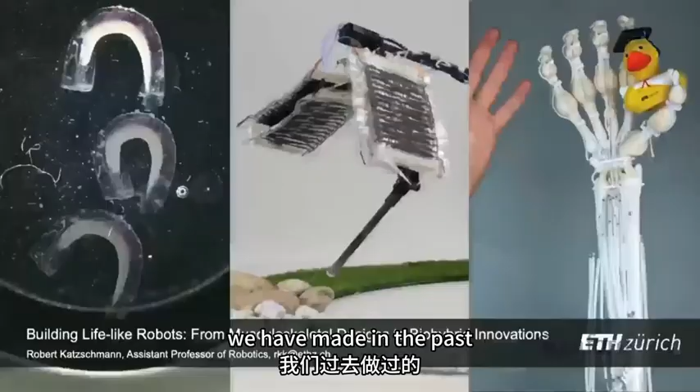I will talk a bit about how we are thinking at the moment about robot morphologies, how we want to build robots of the future, and how we could maybe rethink some of the assumptions we have made in the past about robotic designs, about robotic control.

But to start, let me take this quote from Joanna. Joanna is a novelist. She enjoys writing books. She's not an engineer. She's not a scientist. And what she said is, you know what's the biggest problem with pushing all things AI? Wrong direction. I want AI to do my laundry and dishes so that I can do the art and writing. I don't want AI to do my art and writing so that I have to do the laundry and the dishes. And I think she has something to say here, which is quite relevant.

So we can obviously use ChatGPT and other tools these days to really make our life easier when it comes to writing these manuscripts or our emails. But pushing the limit of what our robots can do, I think there's lots of open space to work in this. So what do robots already do for us today? Where do they help us in terms of home and at work? What comes to your mind?

Toasters? Oh, that's an interesting robot. This is the first, I've not heard this one before. Okay. I'm not sure how much autonomy is in the toaster. The ontology of toast. Okay. Any other robots that you can think of?

Roombas, vacuums, yeah. Obviously this is a robot. This is the robot that we know. It's going to weld your cars, and autonomous vehicles. But there's the Roomba, or these vacuum cleaners, or the robots that will wipe your floor. And then there's also these creatures. I think you call that one Clifford, I learned today, because it's red and it's like a robot dog Clifford. It's actually our home robot from Zurich, right?

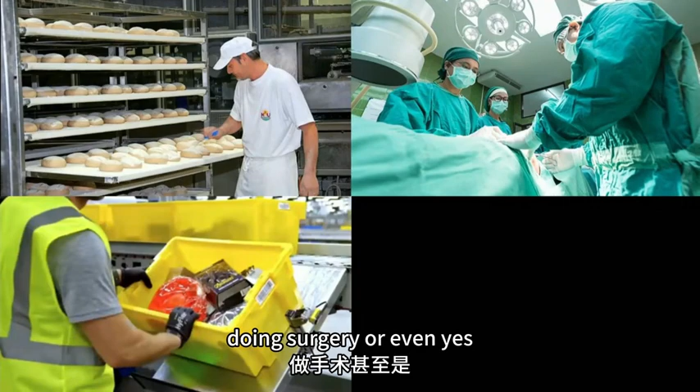It's the ANYmal. But one thing they don't do is interactions with the world. They don't really do that yet. I mean, they may be vacuuming or they touch the floor, or they maybe make a perfectly welded line. But the more messy things, like handling bakery items or doing surgery or even doing the fulfillment center duties that currently an army of labor workers are doing, all of these things require interactions, even restocking our shelves in the supermarket. So the question is, why is it so hard for this embodied AI that Joanna wants to see? Why is it so hard for them to interact with the world?

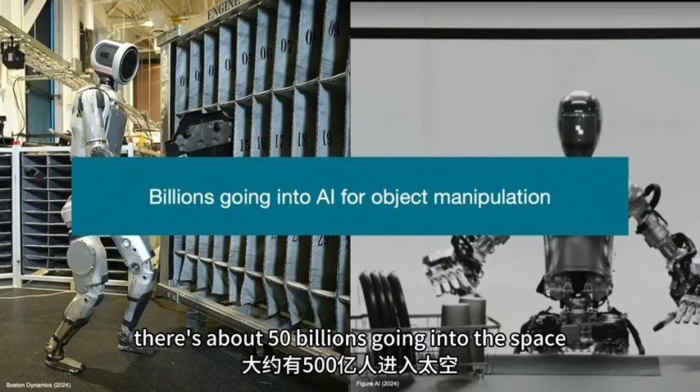Well, there's already people doing this. You might have seen Boston Dynamics picking up plates from a car, taking it from one side to another to help in the assembly line. Figure AI does something like this too. They're actually trying to do the dishes for Joanna. In this case, it's just a mock setup. And there's billions, today I learned it's about 50 billion, going into this space for AI, for object manipulation.

And I'm thinking, if the robot would do this in my kitchen, I wouldn't want to stand next to it. So it is a bit scary to think about the current technologies we use, the metal machinery, the motors and all of this coming into the design. It's going to actually be quite painful. So is this design ready to safely interact with us? Not really, right? So we need to rethink the robot's morphology.

And one way you can think about this is we could bring together the ideas from multiple worlds. So we could look at soft robots. Soft robots is something I've looked into a lot in my past, which is just to build robots to make them soft for the sake of softness. I remember many years ago sitting in a car with Oussama Khatib here from Stanford, and he was asking me, Robert, why are you building soft robots? What's the point of them? They can't really do anything.

They're so soft. And I think there is something to be said: they can maybe not handle high payloads, but they do have something to say. If they interact with you, they're not going to hurt you. Steve was also telling me today, the soft grippers that could be on the end effector of a robot can actually, at least for that part of the robot, when it touches you and hits you, not really cause as much damage as a rigid gripper.

But then they can't do the payload capacity of a rigid robot. A rigid robot can actually lift weights, it can move over rough terrain, and it can be quite sturdy. And then there is nature. Nature, that's us, that's the animals. That's what we have in nature.

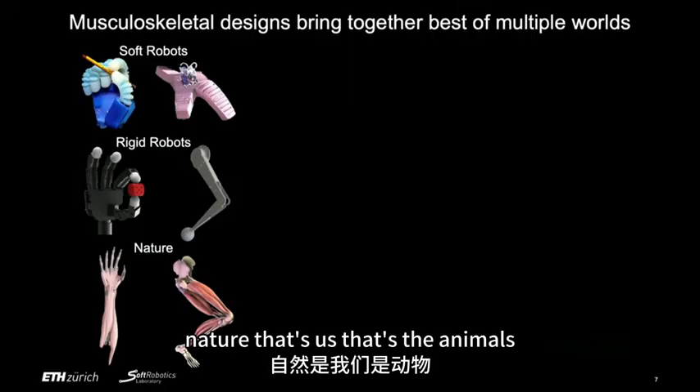It's a musculoskeletal design. So what can we do to bring together the insights from all of these worlds to build these hybrid robots, these robots that have an inspiration from the musculoskeletal design idea, but also from taking the softness of the soft robotic world to build these muscles and other soft tissues. And in the end, have a robot that can both carry payloads, but also can be gentle and can be adapted to the environment. So its mechanical impedance can be better matched with the actual world.

Like yesterday, for example, I saw a Booster Robotics robot. I think you also have one here. I saw it earlier in the center. When you turn it on and have it walk around, it's really loud. It's hitting the floor and stomping around. And it's just because there's many, many things you can do with a musculoskeletal design that rigid robots with its motors can't do. So today I will be talking about a couple of ideas in this space.

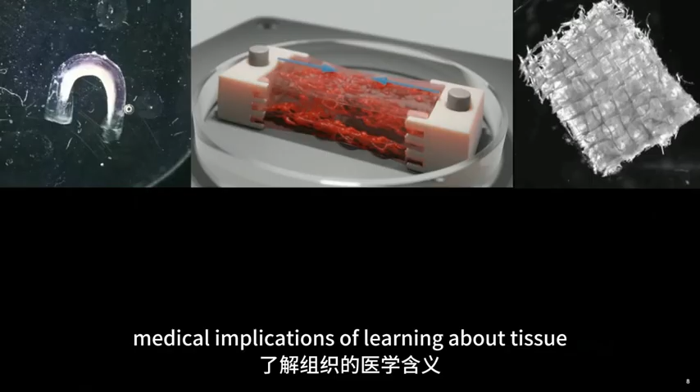So first, I want to talk about the most extreme ends of what we're looking into, which is to actually build muscles from cells. And then I will talk about what are challenges that we face there, and even quickly mention what could be even medical implications of learning about tissue engineering with biological cells that help for robotics, but maybe also beyond this. And then I will talk about musculoskeletal designs.

So taking not just from one muscle, but thinking about many muscles and what are the challenges there, towards making them actually more feasible and untethered, towards the question of how can we produce all of it, not just the muscles, but also the whole structure. And then what are the autonomy challenges there? Like how can I actually showcase these designs that I can do something autonomously? Because if I just build something, show it a great design, but it doesn't do anything, you won't necessarily give up that Unitree robots that you are already having in your lab.

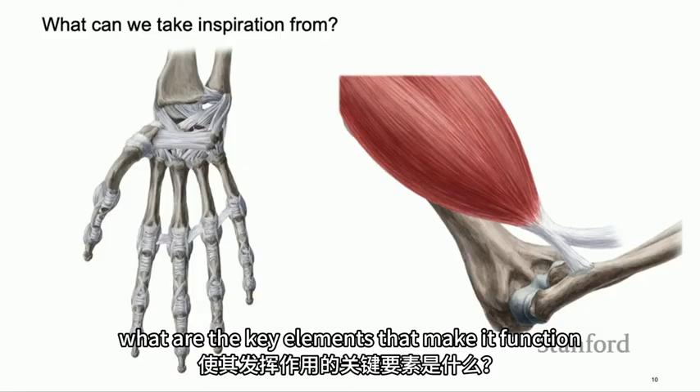So what can we take inspiration from? Obviously, I can take my hands, I can take an arm, I can take a leg, I can look at the human anatomy, and I can ask myself, what are the key elements that make it function and work? It's the muscle. The muscle moves it all. The muscle makes the key ingredient, in my opinion, of a robot. If I don't have an actuator, in this case a muscle, it's not really a robot.

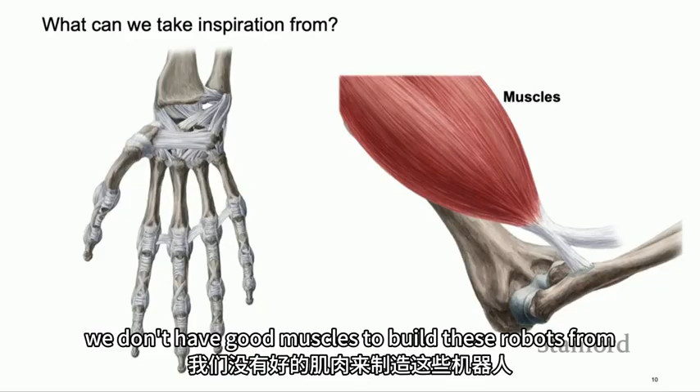But then I also need other parts. I need the bones, I need the tendons, and I need the joints, and I need the ligaments. So we need to come up with solutions for all of this and the interplay of all of this to build our future robots. We have started to look a lot into muscles because we see the biggest lack in the musculoskeletal area is we don't have good muscles to build these robots from. So let me spend a lot of time on this today.

So the first thing, as I mentioned already, is we have a part of our group that just asked the question, can we build robots that are made of cells? So can we build muscles that actually use cells? And this is not your hypothetical cell on the computer that you simulate. No, I'm talking here about using the cell from animals. And now the question is why? Why would I want to go this route?

Mark, why would I want to use cells? Isn't it crazy that we can speak, walk, run, bicycle by eating two hamburgers of food a day? The way we process energy and move is really efficient. Yes. So the way that we take in energy is drastically different to the humanoids that we see right now. They have to have a battery, but the cells, we take our hamburgers. Or maybe other healthier foods, but like, yes, definitely.

So, if I were to look at a few points that people would say, these are the features that we want to really make use of when we work with cells, then it is the self-repair, the ability for many cells to come together and eventually in a swarm arrangement to assemble, to self-repair, to be self-sensing. So cells have multiple capabilities. They're not just, for example, a muscle, but they can also have proprioception.

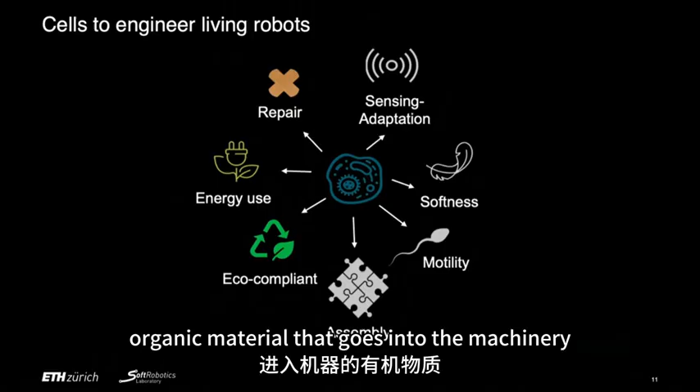And they're also inherently soft. So it meets the requirement that, as a soft roboticist, I like to see: cells can be soft if they are not becoming a bone. And they can also be sustainable and eco-compliant. So I'm using organic material that goes into the machinery and it produces the structure. If I find fully sustainable ways, I don't necessarily need to produce a lot of waste with these robots.

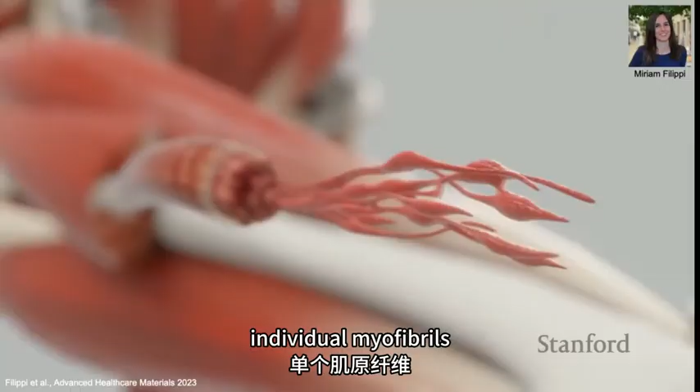So when we look at this, how should we go about this? Basically, we look at a muscle, and a muscle consists of all of these individual myofibrils that you start off with, and you could culture them in a petri dish. And well, this doesn't really give you a muscle yet if I just throw them randomly in there. So you have to come up with ways of bringing them into a structure that can be a muscle.

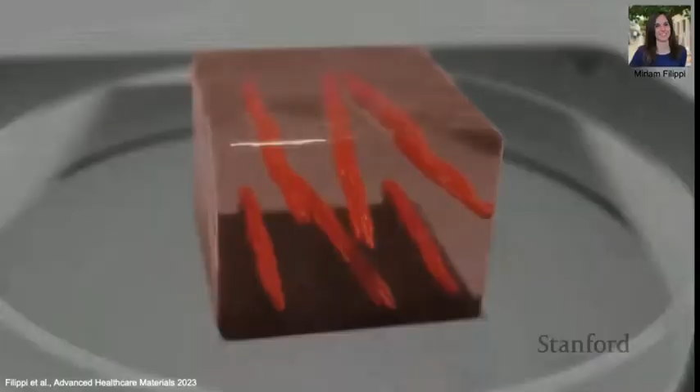So one way of doing it is you take a hydrogel and you throw so-called stem or progenitor cells into the hydrogel, and with the right differentiation protocols and maturation protocols applied to it, you can actually build up muscle fibers. So in the interest of time, let me dive directly into my favorite project that we're doing right now.

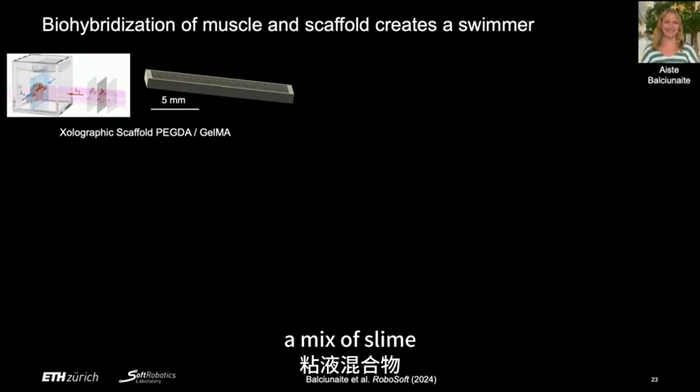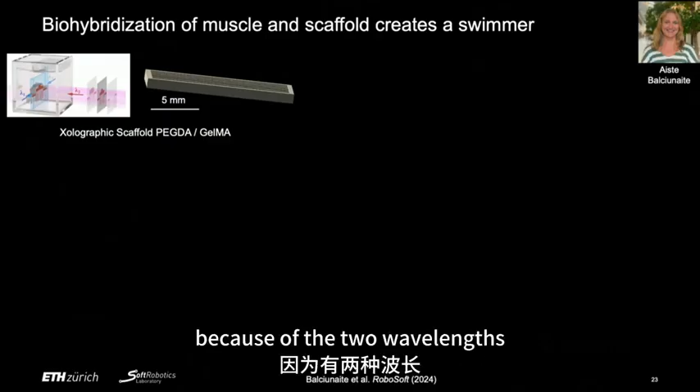And this structure allows, when we place the cells on top of it, a mix of slime, I will get to it in a moment, to align along those grooves and also to restructure this whole scaffold and eventually makes a swimmer out of this. So we have this construct and we have a printer that uses two wavelengths. These two wavelengths go into a bath, and wherever two wavelengths hit, it takes a photoinitiator. That photoinitiator becomes active because of the two wavelengths. And at that point, it causes a polymerization of the hydrogel.

So we use this to build these scaffolds, and then we put the cells on top. And I can tell you right now, we're also working on projects where we don't put them on top, but we directly put them in there. But this will be for the future. For now, let me talk about this. So we have basically the scaffold, we have the cells, and then in the end, we get the scaffold with the cells seeded on top.

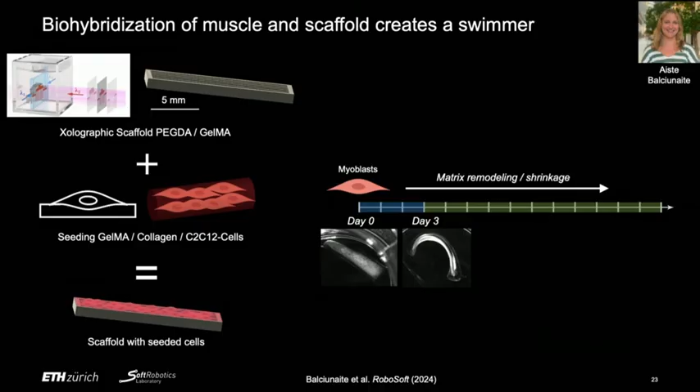And we start at day 0. Down there, you see the construct. It has the scaffold underneath. It has the cells on top. And then as the procedure in the differentiation goes along and the matrix gets remodeled, the matrix starts to shrink. And so the whole thing starts to bend into this U-shaped form. That's because these muscles start to fuse, they start coming together. And as the days pass by, we eventually end up with this construct that is really bent into shape. And the muscle has matured, and now we can start playing around with it. So we're going from myoblasts towards these myofibers.

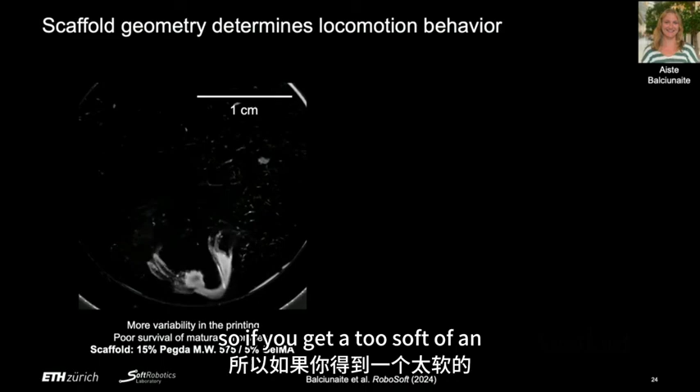When you get it wrong, that's what you get. So if you get too soft of an underlying scaffold that is not surviving, we would say it has a poor survival of the maturation process, you end up with these slightly dysfunctional swimmers. If you get the mix right for the scaffold, you can actually get a pretty good proper swimming behavior from it. And it swims, I will get to this in a moment, because we give it a stimulus that causes the muscle to contract, and we can pace that stimulus, we can control it.

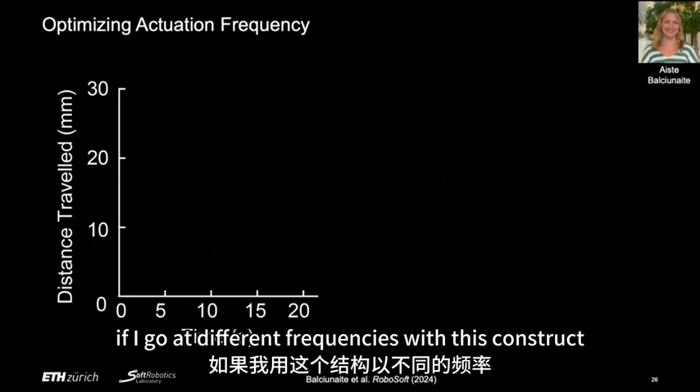So Aiste went ahead and she tried different frequencies. She wanted to see what happens if I go at different frequencies with this construct. So if I go at 1 hertz, what ends up happening is we have these slow swimmers that can travel a short distance in a longer time. As I go up in frequency, you get faster swimming behavior in the Petri dish. And here, this is going up to 3 hertz and then 4 hertz.

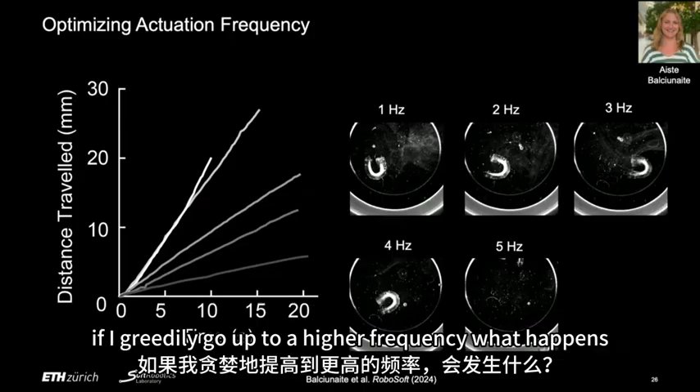And then eventually I greedily go up to 5 hertz and it gets faster. It's still a bit faster than 4 hertz. It swims out of the frame faster, so that's why the line is shorter. And now the question to you: if I greedily go up to a higher frequency, what happens? Slower. Why?

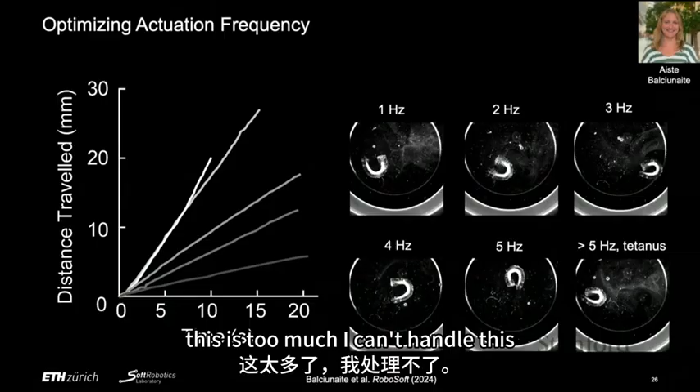Viscosity, friction, okay. Any other guesses? I think it might paralyze because the stimulation is too high. Yes, it cramps, it kind of goes into tetanus. So that's what we get here - this little one that's just sort of like, sorry, I can't do this anymore. You're overstimulating me, this is too much, I can't handle this. So yes, it does not swim anymore.

And it's interesting - you can start learning about these muscle constructs and how they behave without actually having to harm an animal. I want to mention, we never killed an animal for this experiment. We just got a cell line from a supplier that has immortalized the cell line, and we can passage it and multiply more and more of these for the experiment.

So this is a close-up from the 5 hertz swimmer. Over there you see the electrode that gives an electrostatic field at 5 hertz. Every 1/5 seconds we give a 1% stimulus, meaning it gets a short stimulus, a 1% duty cycle, then it starts its contraction, eventually relaxes again, and then the next one comes. This is what happens here with the swimming.

What happens when you increase the amplitude? Well, at some point you start electrocuting the cells in some way, but we haven't gone too high with this. It's just a trigger - the energy comes from the nutrients, it doesn't come from the electrical field.

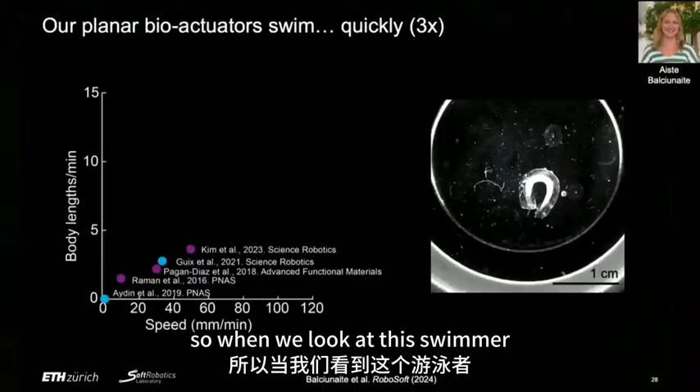So when we look at this swimmer, we compared it to other biohybrid ideas and directions, and we found we got a much higher body length per minute swimming speed with this design. Now we're investigating this area even further, trying to understand, for example, can we model the behavior here? Can we understand why it swims this way, the interactions of the surrounding fluid with the construct? Can we also optimize these structures by changing the length of the muscle relative to the length of the scaffold, and study if this model is actually accurate compared to an experiment we built? This is all work in progress, and it becomes a nice playground for us to learn about these biohybrid systems.

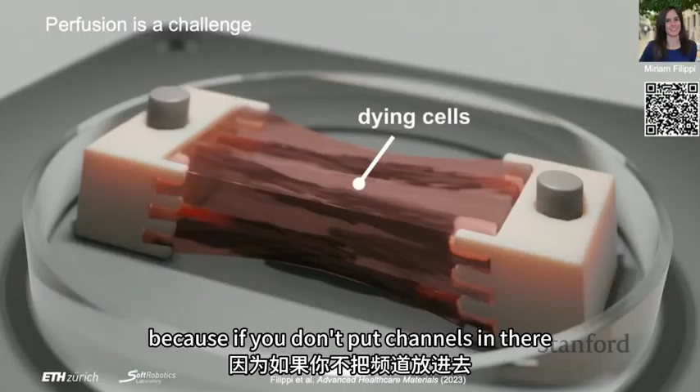Another problem is perfusion. Perfusion means how can we actually make this muscle thicker and bigger? Because in the end, we don't want to just have a couple hundred micrometers of muscle, but centimeter thick muscle or more. So what we're doing here is trying to understand what happens when we put channels into a structure, because without channels you'll have dying cells in the core of your muscle construct. All of our muscles have a perfusion system, which allows them to take away waste products and carry oxygen and nutrients to the muscle.

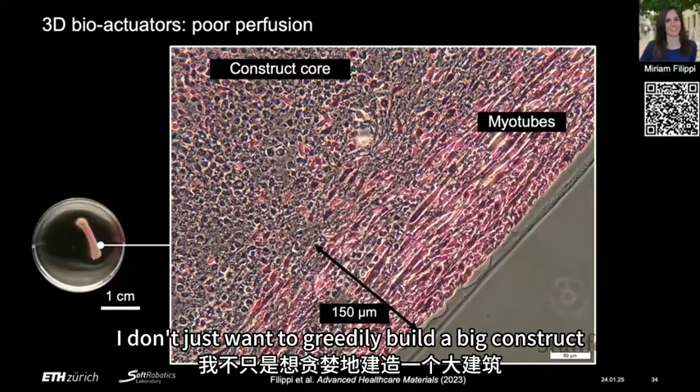So if I look into a muscle construct that has no perfusion channels, what we'll see is maybe 150 micrometers of somewhat built up myotubes, which gives you contractions. The deeper I go into the construct, these are all dead cells. And this is bad, right? I don't just want to greedily build a big construct - if it doesn't get nutrients, it won't survive, and it won't give me muscle power.

So Miriam started looking into this, and she said, let's actually make a construct that we extrude both the myoblast, but also an anchor structure on each side. And then we also interlace perfusion channels that can afterwards be removed. With this experiment, we basically take a muscle, run a dye through it, and want to see how quickly this muscle becomes pinkish, becomes this color.

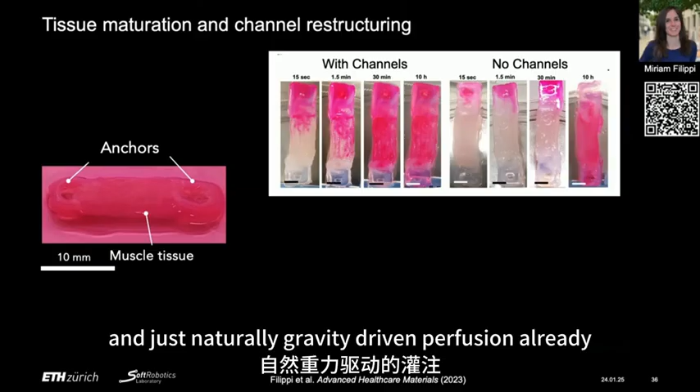So we take constructs with channels and without channels, with just naturally gravity-driven perfusion already. We lay the construct at an angle, place our nutrient solution with a dye on top, and within a minute or so we get perfusion through the construct, which we wouldn't get without the channels. Another thing we see in this study is, 6 days into the maturation process, we still don't have fully built up muscle fibers, and we still have these white channels that we produced initially.

But as it further matures, these channels get thinner and thinner. That's because of the shrinking and remodeling that the cells are doing to the hydrogel matrix. So that's not even accounted for in the models I just showed you. We haven't really accounted for the maturation process that goes from an initial design to a matured muscle that has completely reshaped itself.

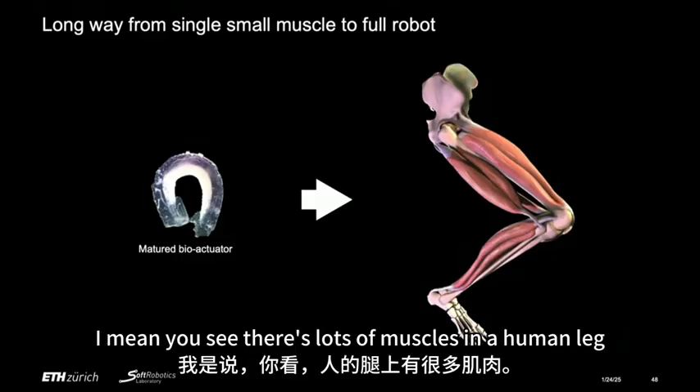So we're still a long way away from using these actuators to build this. You see there's lots of muscles in a human leg, and they're really big. The thing I just showed you here is on the order of 1 to 2 centimeters in size, and we want to build muscles that are much larger than this.

So one thing we have been looking into is using hydraulically amplified self-healing electrostatic actuators, which is a mouthful, also simply called HASELs. This is something that Christoph Keplinger's group at CU Boulder developed. We've been using this as a starting point for musculoskeletal designs that take electrical energy from a battery and directly place it into contraction.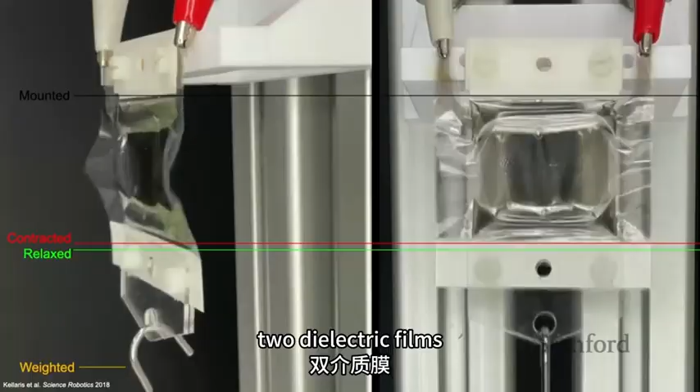So this is how it looks like in real life. This is using two dielectric films, and then we place on it a carbon electrode material on the outside, and we put opposite charges on each side, and as I apply voltage, it lifts up a weight over there.

The first thing we tried with this is we made a fish, which is a nice thing to start off with because we don't have to worry about gravity. We can just throw it into the liquid and try it out. But we had a few problems with this. One thing you can't quite see is we are not swimming in water.

Let me ask you why. It's conductive. And why is this a problem?

The electrodes in the original HASEL design are just exposed, and you don't really want them to be in a conductive liquid, so we started swimming in oil. But swimming in oil is actually quite bad — it's not so easy to swim in oil compared to water. Have you ever tried to swim in oil? Probably better this way, not to swim in oil. But this fish had to swim in oil, and it also had multiple electrodes coming in.

And so that lets me point to the elephant in the room. The elephant in the room is there's these humongous power supplies that sit on the outside. People usually don't like to show them because they're not very attractive to talk about when discussing robots that will discover the world, but there's this huge power supply.

So we then started, first we tried things outside of water to see if we can use the HASEL design to build legs towards the idea of a musculoskeletal design. So here, this is sort of our baseline system. We call it a joint-centered system, or joint-centered design, where we take an electromagnetic motor and place it into each joint, and then we basically run current through these electromagnetic motor units. It's a brushless motor, and then it moves around. This is what you know from current humanoids.

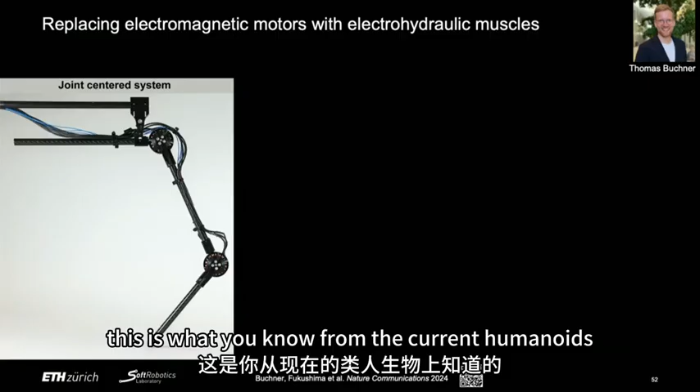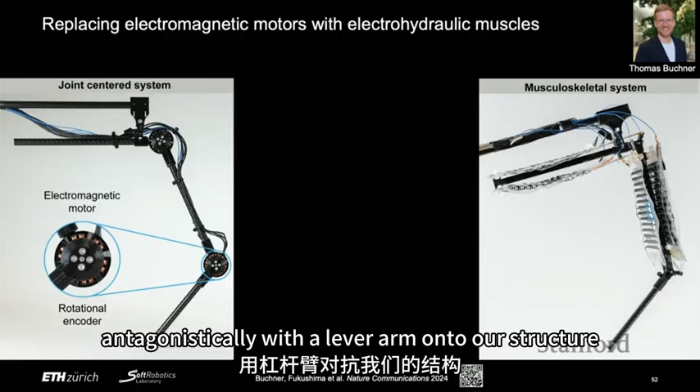We built everything the same way as we built our second HASEL system. So here we have the motor, we have an encoder in there so we can know where we are in terms of positioning — we need this, otherwise it doesn't work. Then we build a musculoskeletal system: here we ditch the motor. The rest of the carbon fiber structure remains the same, and then we place a ton of HASEL muscles in there that basically become our antagonist muscle units, allowing our leg to pull antagonistically with a lever arm onto our structure. This is the HASEL on the right side. We call it self-sensing because essentially it allows us to sense the contraction and also the change of capacitance under loading.

So basically, on the left side we have the electromagnetic motors, and on the right side we have the HASEL muscles. These are our actuators. On the left side we would use joint angle encoders, while on the right side we can make do with just the self-sensing capability of the capacitors. On the left side you usually have a linear transmission, like a planetary gearbox, or some other way of taking high rotations per minute and low torque and translating it to higher torque and lower rotations per minute, which you often need for robotic applications.

And we don't need this. We just use different nonlinear moment arms for our tendons to attach to, the same way that we do it in our human body. Or maybe Mother Nature does it that way in our human body.

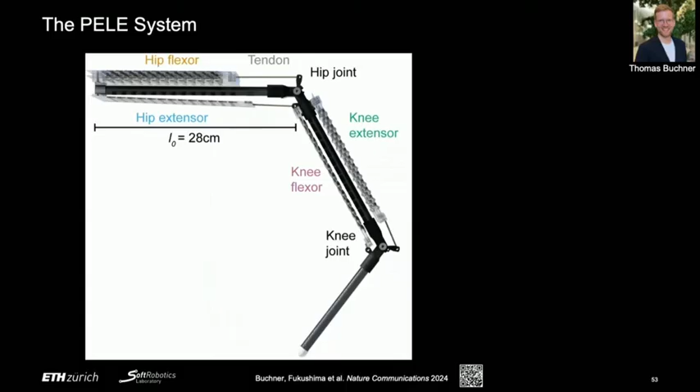So this is the PELE system, and it has the hip flexor, the hip extensor, the knee extensor, and the knee flexor. So we have these 2 degrees of freedom in the system. Then we have 4 high voltage amplifier units.

We also do packaging of these muscles. The design rule for this: if you stack the pouches in series, you get more strain, more delta X. If you put more on top of each other, you get more force. This is how you can basically design your muscle unit in this case.

And now let's get to some experiments. So Thomas then started looking, together with Toshi, at how agile the system is, how adaptive, how efficient, and how self-sensing works for the system.

When we look at agility, we try to do, for example, high jump experiments. Just to see, can this thing actually hop off the ground? And how does it hop off the ground, and what are the impact forces once I lift off and land again? This let us study the system from that perspective.

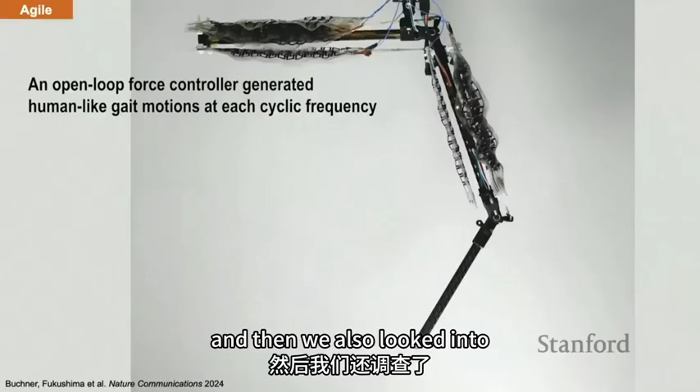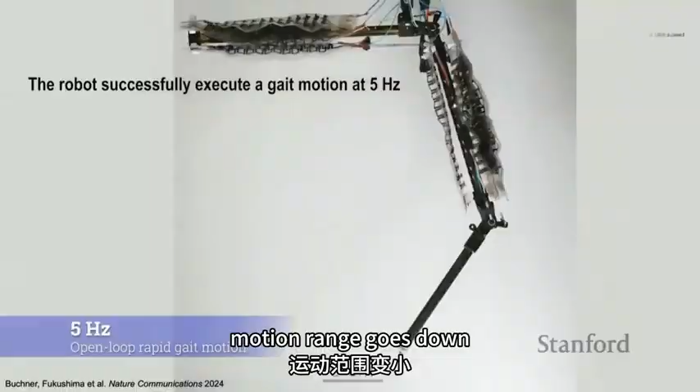We also looked into how fast we can run this. I can actuate this at 0.5 hertz and get a certain motion cycle, and I can go faster. For example, at 3 hertz, which is still a slow speed, I get a fairly large motion cycle. But as I go up in speed from 3 hertz, I can go even faster and we get a smaller motion cycle. At 5 hertz already, you see the motion range goes down.

And we can run this all the way up to 10 hertz. So this is actually quite agile. Let me run this again - this is 10 hertz. So the thing can be run quite fast just by charging and discharging the muscle, but we get a fairly small motion range. I'll get to what causes the limitation to the motion range when you have 2 muscles pulling on the structure.

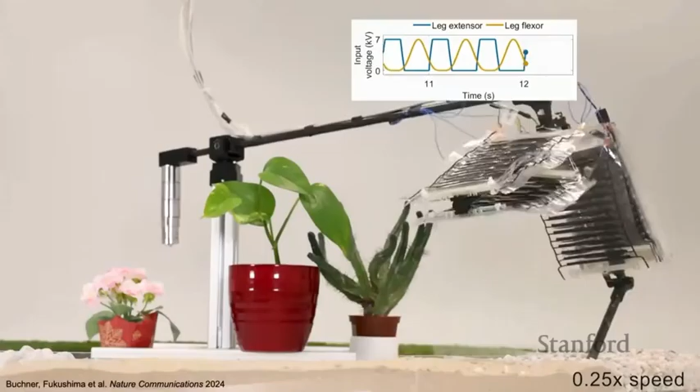So now we tried an open loop experiment where we put it onto a boom, and now the leg is hopping through our little garden - this is like the lab garden environment, with a cactus and a proper plant, probably the only plants you can easily maintain in the lab. You see the leg is capable of going over different types of terrain without using any closed loop control. All we're doing is changing the signal you see on top, between the actuation of the leg extensor and leg flexor, and that allows it to hop over the terrain with a hopping gait.

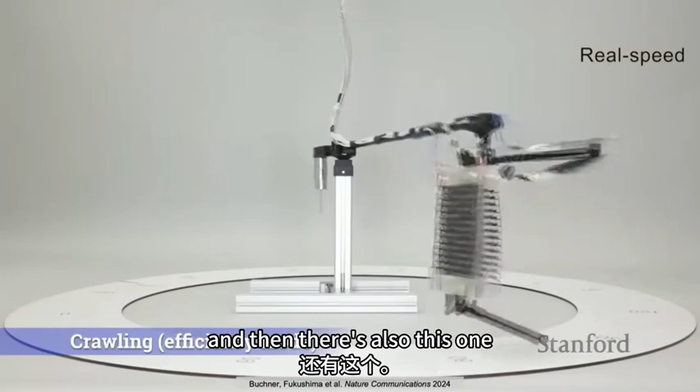We can also try this for other surfaces and see how well it hops on them, and we can try different hopping modes. Here is the speed mode, where we can do a very long stride. But we can also do the efficiency mode, where we use less energy - overall, from a cost of transport perspective, the more efficient mode. And then there's also this one, like the crawler, which is actually the most efficient mode because I don't have to take off - I just crawl forward.

But it only works because I take the rubber tip off the foot, so I have a little bit of better grip going down on the surface, and I don't have a rough terrain.

So then we looked at the cost of transport, and we found we were quite good, at least for the system we looked at, in terms of a single foot compared to land animals.

And then there's another thing where we looked into the self-sensing muscle. So we want to understand, can we actually use the capacitive change of the muscle to detect an obstacle?

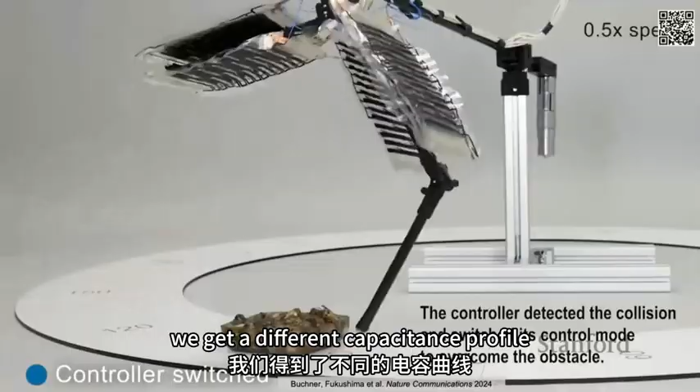So here's the obstacle on the left side, that's just a stone. Now the robot is just hopping in a normal gait, and then it hits against the stone. It senses a change in its capacitance, and it changes its gait cycle. This allowed us to see the capacitance change. The moment it makes contact, we get a different capacitance profile for hitting against the stone. Then we just change to a different controller that lets this leg hop over the stone.

Then we also looked into what if we not only use the muscle by itself with its capacitor, but we can actually, nothing speaks against still using an encoder. Like, why not have an encoder in the joints as well?

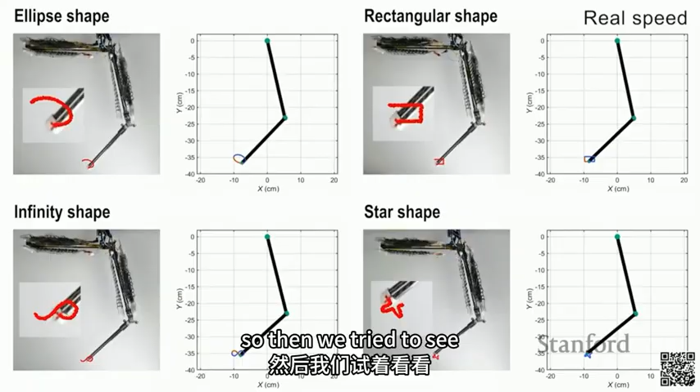So then we tried to see, can we track different motion cycles? Can we do a circle? Could we do a figure 8 and different sorts of motions? And how accurately could we track a reference trajectory with the tip? One thing we found in this experiment is that we were able to track it, but we had a fairly limited motion range. Now the question to you is, why?

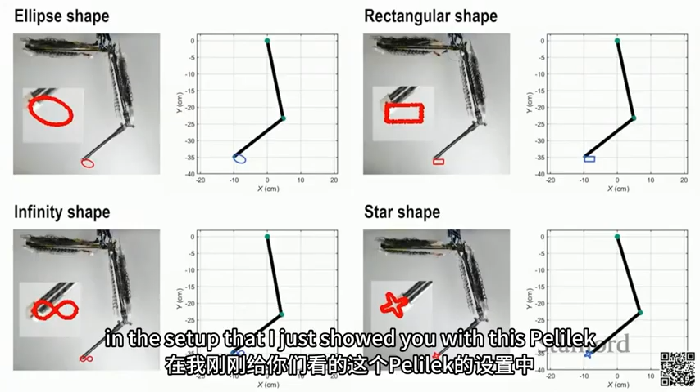Why, in the setup that I just showed you with this Pelé leg, is the motion range sort of limited to a small motion range in the tip of the leg? It's not able to do these large motions. I can do this with my arm, right? I can do quite large motions with the tip of my finger. So what is mechanically the challenge here?

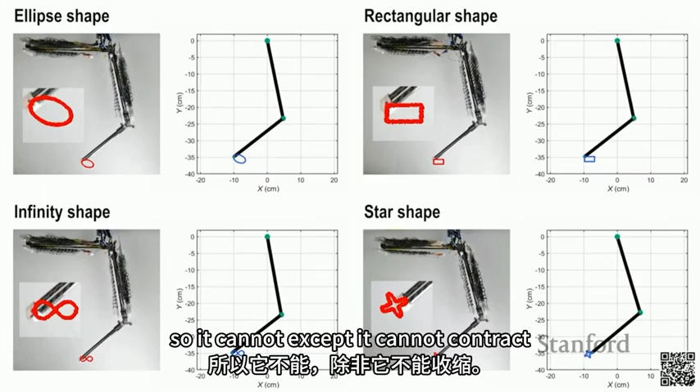The muscle. And what's the problem with the muscle? Why can I not do this? It's a single isotropic material, so it can contract or extend only as much as the muscle allows. It can contract, and technically you can collapse this muscle passively because it will just fold up or buckle up. But the problem comes, and you see this now here, if I take the muscle and I pull on it, it doesn't extend. It's a film, a flexible film, but it's not really an extensible film. If I pull really hard on it, I just rip it apart. It doesn't really, it's not elastic, right?

So if I look at this from the motion range you see here with the actual natural muscle, the challenge is that if I want to match the range where animals would have their muscle also be at, I would have to actually be extensible. Down there is the length over the resting length, L0. Natural muscle can be both contracted actively, while you see my triceps right now was extended to allow this to happen. And that's not possible with this design.

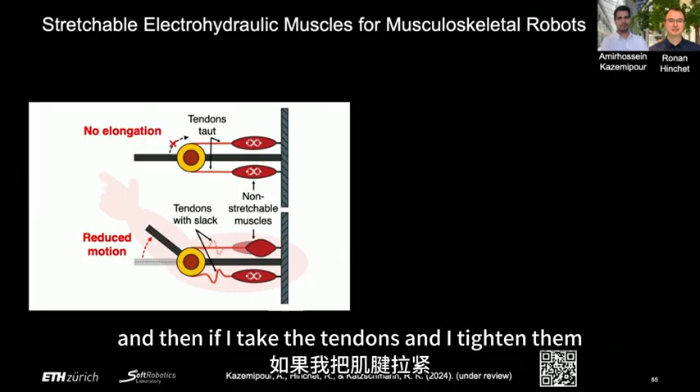So then Amir and Ronan thought about what's the problem here. We have on the top the two muscles. This little cross in there just says the muscle is not really extensible. If I take the tendons and tighten them, ideally for a good system they are tightened properly. If I do this, then I get no motion range, because I'm trying to contract one muscle and the other one will not give in and won't allow me to do this. But if I now put a little bit of slack onto the tendon, I get some motion. And that's exactly what we did for the Pelé system.

We put a little bit of slack in there, so we get that motion. But you can imagine that's not very good from a controls perspective, and it's also not a very efficient way of doing it. So what we started doing is to say, why don't we take the muscle and couple it with a clutch? The clutch itself is basically something that can selectively engage and let go, the same way in your car that would be the case. But also it has an elastic fabric around it that takes the clutch back once there's no loading on it.

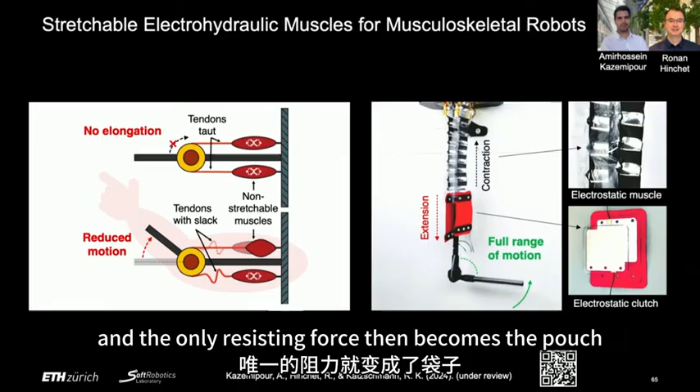So the way this looks, we have the HASEL on top, we call it the electrostatic muscle. And on the bottom, in this pinkish red color, that's the fabric. Inside of the fabric sit two PVDF clutch units, which are basically two dielectric materials with electrodes. You apply a voltage and they stick together and become a closed unit. If I take the voltage away, they can freely slide, and the only resisting force then becomes the pouch, this pinkish unit around it, which extends.

So what happens here is, on the left side, I do muscles without clutches, and you get a limited motion range — you have just some slack in there. On the right side, if I actually use the clutch, I can get a much larger motion range. So you can imagine me now using this to build the follow-up generations of the Pelé system. We get larger motion ranges and can actually start building humanoids or even just bipedal or quadrupedal systems from this.

So let's get back to the elephant in the room. What was the elephant in the room again?

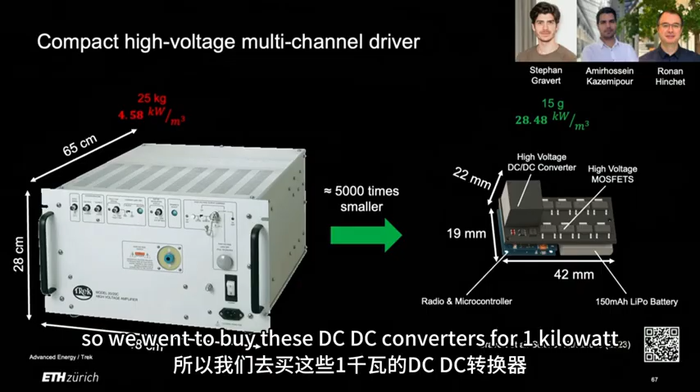Why is that? Because at those high voltages, they use other means — for example optocouplers, as they're called. They use an optical signal to couple, and that is actually very energy hungry, it's bulky, it's big. So we went and bought these DC-DC converters for 1 kilovolt, and we bought MOSFETs which were really compact, but we had to go back and redesign the HASELs.

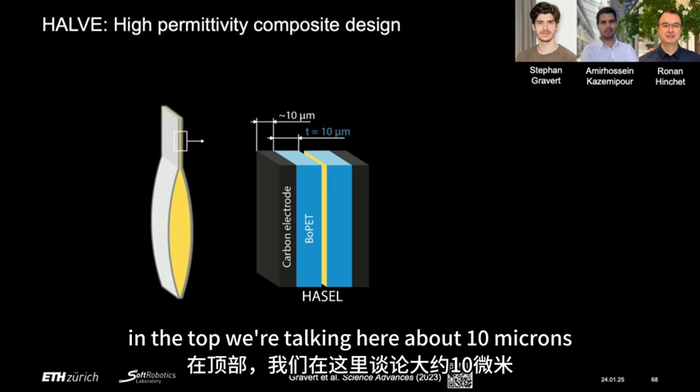So HASELs are designed like this — the traditional HASEL design. We have an electrode, then a dielectric, in this case a BoPET in the middle, and then we have some oil in between. When the thing is stacked, it looks like this — I'm just showing you the little excerpt up top. We're talking here about 10 micrometers for the electrode and about 10 micrometers for the functional layer that isolates the charges and acts as a dielectric.

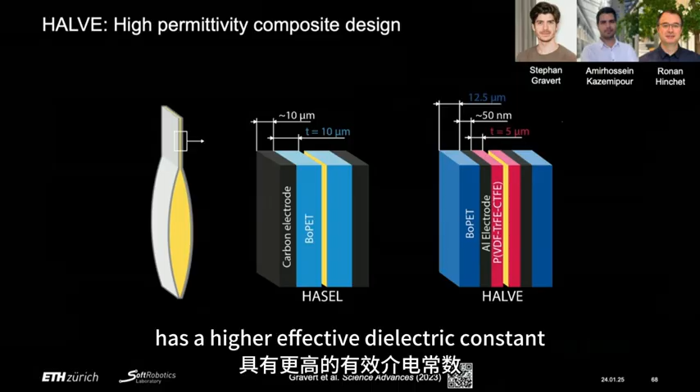Now, I can replace this and move the BoPET to the outside, have an electrode, and then use a different material shown here in red, called PVDF terpolymer. That PVDF terpolymer has a higher effective dielectric constant, which allows us to go down in the operating voltage while we remain at a high force. So with this, we made a muscle called HALVE, which stands for hydraulically amplified low voltage electrostatic actuators.

And with this composite design where we have these multiple layers, we could build a muscle that now gives us a couple of advantages. First of all, the electrodes are actually now insulated, so I could put this also underwater. And I also have the low operating voltage. How does this look like?

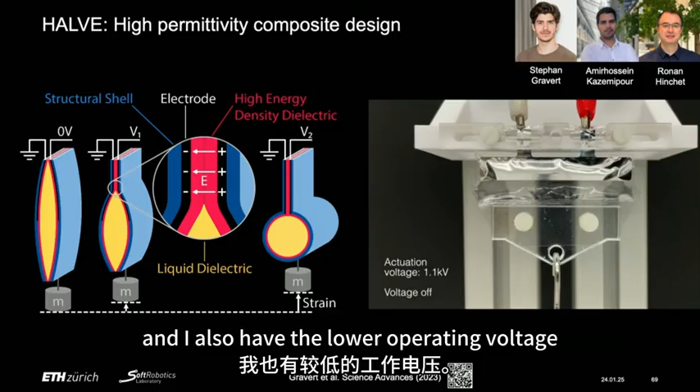So from an actuation voltage perspective, if I operate at, let's say, 1 kilovolt up to 1.5 kilovolts, I very conveniently am in the regime of low voltage components. So from power electronics industry norms, anything below 1.5 kilovolts is considered to be low voltage. So this has a certain advantage to operate at this regime.

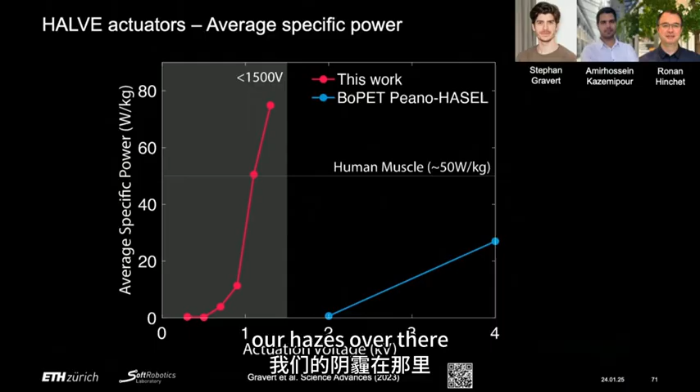And the other thing is, with these muscles, we were able to go to powers of like 80 watts per kg, which is very comparable to a human muscle in terms of average specific power. Our HASELs over there, they run all the way to like 8 kilovolts to do the same thing. So now we made a muscle that you can touch.

We also have a swimmer that would use 2 of these muscles in there. And then we have this little gripper that holds onto an object. Those were our first test cases to see how well we can use these muscles. And we are now building the follow-up systems to use these muscles in the designs that we're interested in, so that we can build robotic systems that operate at like 1 or 1.5 kilovolts with compact electronics and reap the benefits from this design.

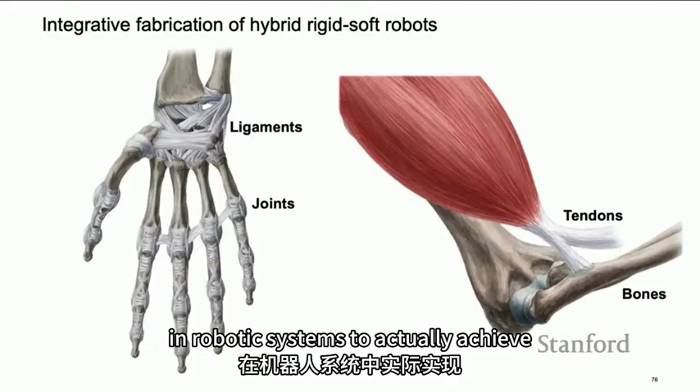Okay, so I talked a lot about muscle, but there's other things in robotic systems to actually achieve musculoskeletal designs. And as I said before, these are ligaments, joints, tendons, and bones. So one of the systems in nature is our hand that has a lot of that in a very compact space. And if I want to build them, it's quite tedious, and it takes a lot of time to actually assemble it.

So if we manually assemble robotic hands in our lab, it takes us multiple days to do a good job at that. So we wanted to figure out what we can do to speed up this process and build the design, this is the skeleton view, with all of these things in there except for the muscle. So this is Thomas's hand.

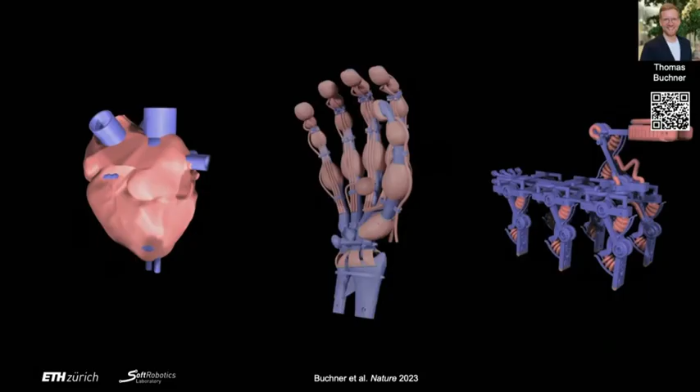And if you scan a human hand, you can basically take its skeletal structure out of it, and you can then place artificial capsules and ligaments around each joint. And you can additionally put tendons in there, and even little pressure units, hollow cavity units that you see on the fingertips, to make a hand. And while you're at it, you can also design a heart that has soft and rigid components and valves, and even a rigid-soft walker that has muscles that can be pressurized.

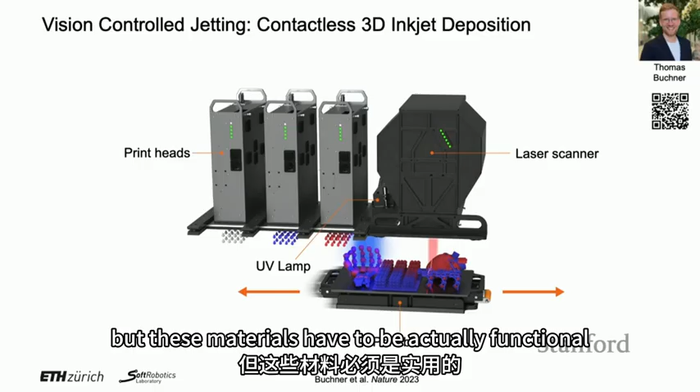So with this, we developed together with a team in Boston a system called vision-controlled jetting. And in this work, we tried to understand, can we put a ton of droplets down of soft and rigid materials? But these materials have to be actually functional. They cannot just degrade over time. They cannot have poor material properties.

And so in order to achieve this, we had to find a way of not depositing the material and then scraping it off, but actually depositing and scanning the surface to then adjust every layer in a closed-loop manner that we print with this inkjet method. So you see a print head here that deposits a layer. And when you deposit, there's always some unevenness. And traditionally, you would take a scraper or a roller to flatten it out.

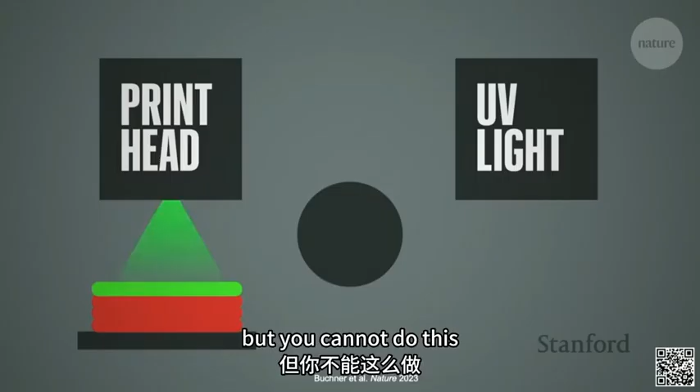But you cannot do this if the material that you're putting down is not properly curing right when the UV light shines on it. It doesn't work. It will goo up your system, and it will not yield the properties that you want. So what we developed here is a system where you print and then scan every layer. So you print layer by layer, and every layer is slightly adjusted to achieve what you want. So you go from original design to these layers.

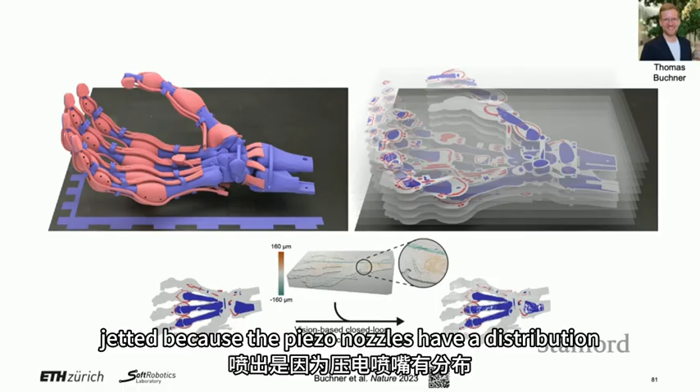And so you start off, you want to print the next layer of this hand. So there are soft and rigid and wax materials that you see here. I scan the surface and I realize, oh, there are some areas I've under-jetted and some areas I've over-jetted, because the piezo nozzles have a distribution of particle sizes that come out of them.

And then my layer, originally which was supposed to be this, I slightly adjusted to be this. So that on average I stay level without ever touching the surface. So that's the key here. So with this, I can now print other chemistries. Now the chemistries that I can print can actually do their job over long periods of time.

They don't need to anymore be sort of radically polymerizing. They can take their time to polymerize. It gives you better properties overall. So instead of using an acrylate, which say a traditional Stratasys Connex printer would give you, and these are so-called chain growth polymers that use a random and irregular distribution of monomers to then connect when it polymerizes.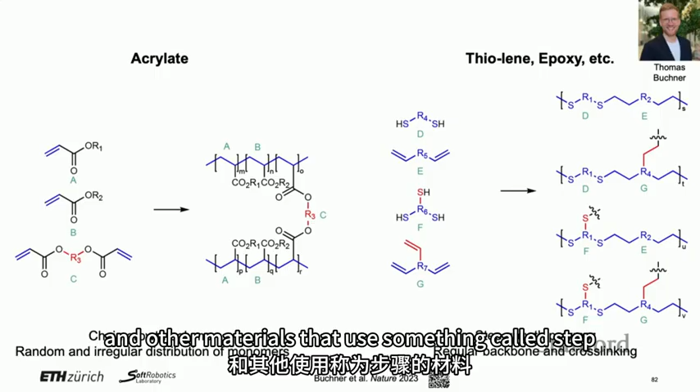We can go to epoxies, silicones, and other materials that use something called step growth polymerization. And that material has lots of advantages in terms of material properties. So one of them is it doesn't age. So the elastic modulus, the Young's modulus, remains constant even after days and weeks. It doesn't change. While these acrylates change, they get much stiffer over time.

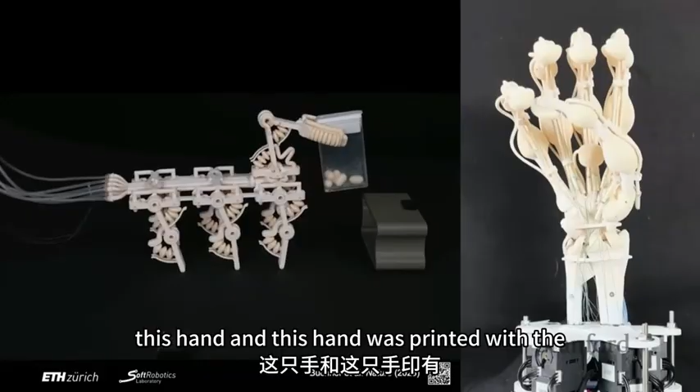So this is a walker that we printed with this, and then we just run a couple of pressure lines from the back that causes the legs to move, and then it touches, and then it senses that it picks up this box, or this tic-tac box, and then it moves backwards. And then the other thing is we printed this hand, and this hand was printed with the printed ligaments to it. And down here, we attach lines to it to pull on these printed ligaments to just actuate. We want to see, can we get this hand that we scanned to be actuated?

So, as a next step, we also put little muscles in there. This is pneumatic McKibben muscles to actuate it. And as we were assembling this, we were still taking, in this case, about an hour to assemble this whole unit. So this is Stefan here in a speed up assembling this unit, and it was still taking an hour.

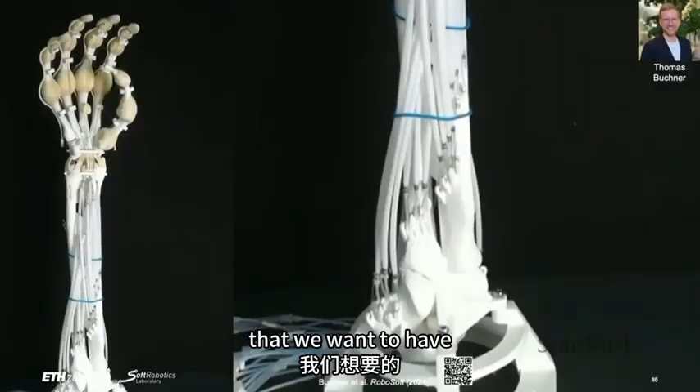And as we were doing this, we were also thinking of, is this actually going to be the final solution that we want to have to build robust robots? And the answer is not yet. There's still more to be done on the material chemistry. The process now exists, but the material chemistry has to even further improve.

So we started looking into building robotic hands also still from an FDM printed design, because we believe it's easier to democratize these designs. So that you, for example, could start running your Isaac Sim or MuJoCo simulations to train your PPO reinforcement learning algorithm. And then you can, for example, roll them out on a hand that can be actuated, and they can learn to roll the ball forward and then change direction to roll it backwards, all just trained in simulation and applied to this hand.

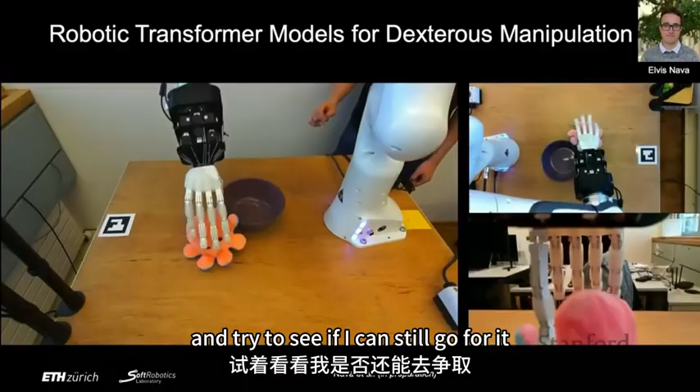And you could also then start using these hands to, for example, run a transformer on it. You give it a couple of demonstrations, and then it will learn to pick up this octopus and put it into a bowl. And you can still annoy it if you want to, and try to see if it can still go for it. So this is what the guys then went off to mimic. They were very interested in doing a startup out of this, and they want to solve a couple of problems in industry. For example, picking up bottles or picking up items from an assembly line.

But one thing that we have not really solved here yet, and I'm very curious to hear about the solutions to this, is how to put tactile feedback into these systems that they can actually sense with their fingertips. We haven't really done a good job on this yet.

And also how we can basically, oh, by the way, I want to just mention here, this user, she got her fingertips numbed for this experiment. So she only sees the matches, she doesn't feel them. And she has quite a hard time, as you can see, to light the match. So it takes her a long time to pick up a match and to actually light it.

And we are getting interested in building these designs and also then building systems that we can teleoperate to, for example, do manipulation of objects and teach objects this way. And one other thing that we're getting interested in is also not just understanding how to build these hands that can then manipulate the world, but how do you also sense the world around us that is deformable and soft so we can better manipulate these objects around us.

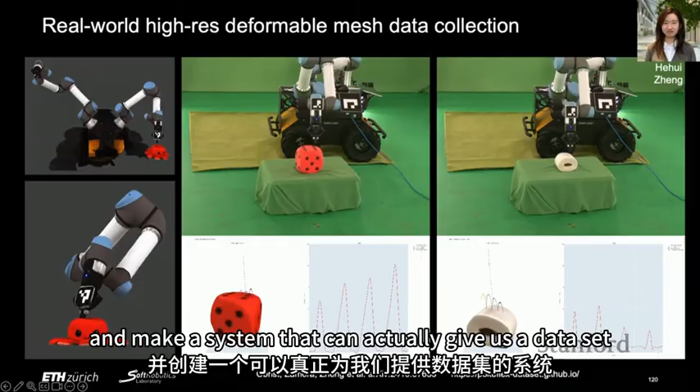So one of the things that Hehui is doing is she's trying to understand, can we, for example, poke at items and deform them and make a system that can actually give us a data set so we can have learning algorithms that look at the scene and predict the deformation behavior and give you measures that you can use for your downstream tasks.

So here you can, for example, take a soft cube. This is the actual point cloud data from it. And we can do this with many objects. So we can try to learn the deformation of these objects and put them into a data set. And then eventually we can start learning with point cloud data, image sequences, and the force data from poking at the objects, a data set that could, for example, in the end, predict deformed meshes. So you could use this then for doing better manipulation with deformable objects.

Okay, so I want to highlight maybe two more things why ETH is really great. You have excellent teams of students, and one of them was a project that I started working on with a focus project team a few years ago, which is this gripper from the air, which basically has two soft grippers that can go down and pick up objects. And the team went on to actually build grippers that can also fly outside and pick objects.

So here you see the drone outside on Höngerberg campus trying to pick up this plush down there. So it has an onboard detection stack that is segmenting the scene and trying to find where the object is. And then it goes for it and picks it up.

And similarly, we also have now systems like this drone. Oops. This is another project by focus project students. So this third-year bachelor built a full 5-meter fixed-wing drone to go after poachers in Africa. That's sort of their goal with this project. And I can tell you there's an extreme level of independence and of capability to build up these systems.

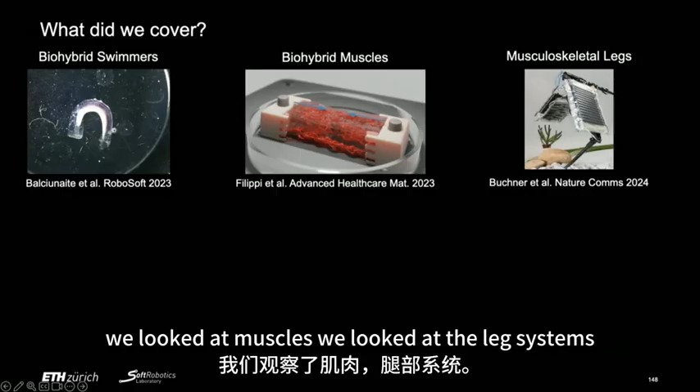So quickly to mention, there's a few things I've covered today, which is these biohybrid swimmers. We looked at muscles. We looked at the leg systems, at these HASEL actuators, and also at vision-controlled jetting. And we also looked at autonomous learning, meaning how can you build systems that can in the end be autonomous and manipulate objects. And in the future, we want to understand how we can build perfusion systems for the muscles, how we can do muscle modeling, how we can also do proprioception into these hands, and also how we can do really proper real-world autonomy.

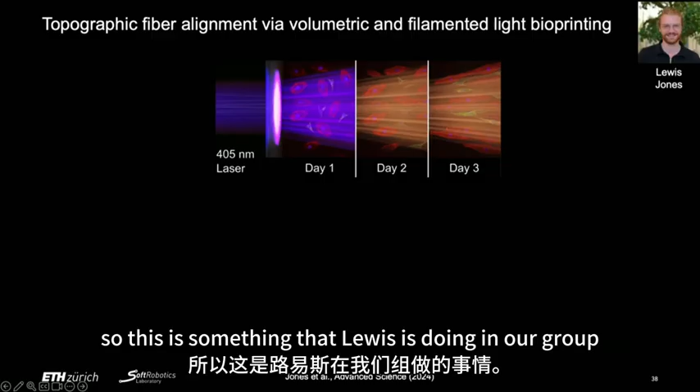And maybe one thing to highlight in this context is we can not only build robots, I mentioned this to you before, but we can also look into building systems that go beyond this. And I want to give you one example here that does this. So this is something that Lewis is doing in our group, where he's taking a different printing technique where we don't necessarily, in this case, have the goal of building a muscle that contracts, but we want to build something that we can use, for example, for medical application.

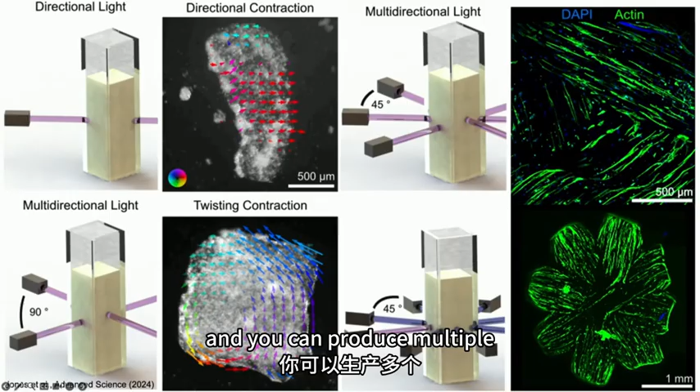So Lewis has been taking a technique that shines a laser onto the gel with a certain speckle pattern that produces cell alignments. And if you then use cardiomyocytes for this, you can start producing cardiomyocyte tissue. You can shine in multiple directions on the construct, and you can produce multiple alignments of cardiomyocytes in the construct. And then it is a contractive tissue that, if you shine with two directions on it, can contract and torque.

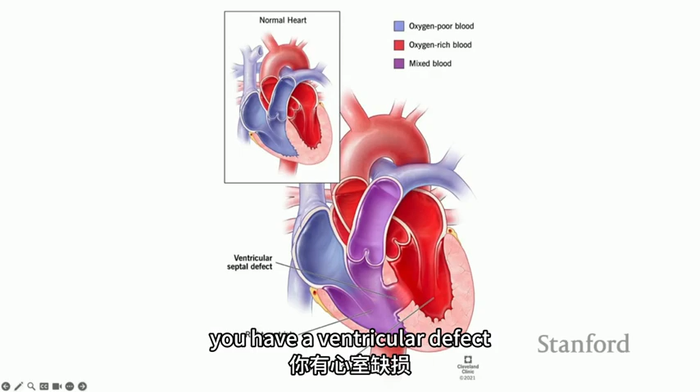And when you then take a step further, you can take it to applications where, for example, you have a ventricular defect where you have a hole in the heart. And then Lewis starts looking at how can I make sort of a metamaterial where I combine techniques from what I just showed you, where I take the cardiomyocytes with a strong structure and I put them onto patches, and then I will start installing them into defective hearts. So the next one I might not want to show you.

It's pretty bloody, so if you mind seeing blood, look away. I want to show you just 2 or 3 images to show you the applications of this.

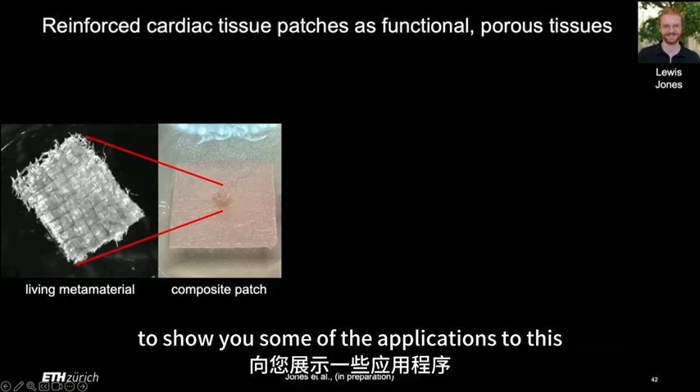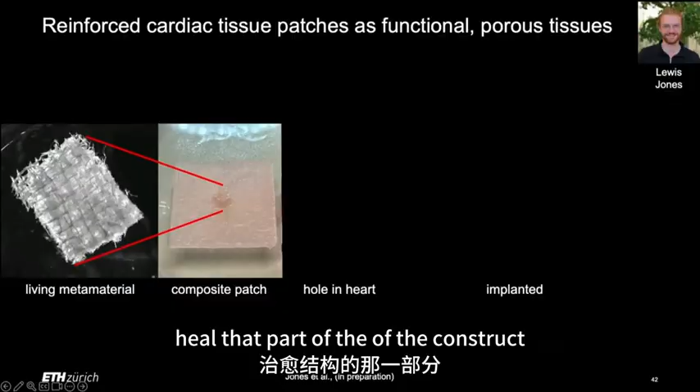This is a punched hole into a pig heart, so in this place you have a hole into the ventricle. Then when you take the patch that Lewis developed, you can suture it back in and close up the heart. But now you have not just a patch that is dead material, it actually has proper iPSC-derived cardiomyocytes in there, and we have the hope that this will help heal that part of the construct. Then in the end we can take it out again and look at what comes out of it - what does the actual patch and the interior look like?

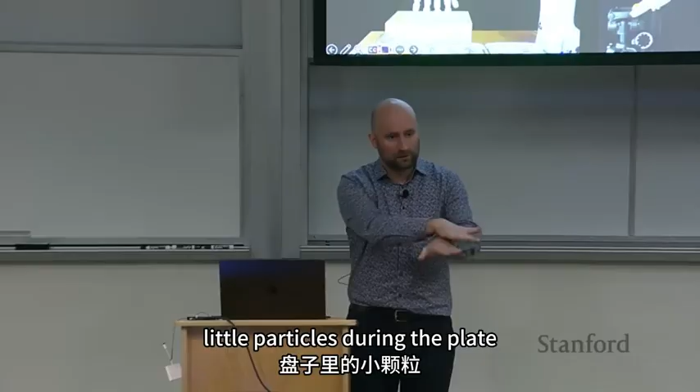It was either an over voltage that he ran onto this or something that caused it to break down. The other thing we found with these low voltage actuators is we're making everything ourselves. We can't buy the actual dielectric films, only pellets of these PVDF polymers. So we have to move into the clean room to make them, because otherwise we're introducing small particles during the blade coating procedure, and those will very easily cause breakdown.